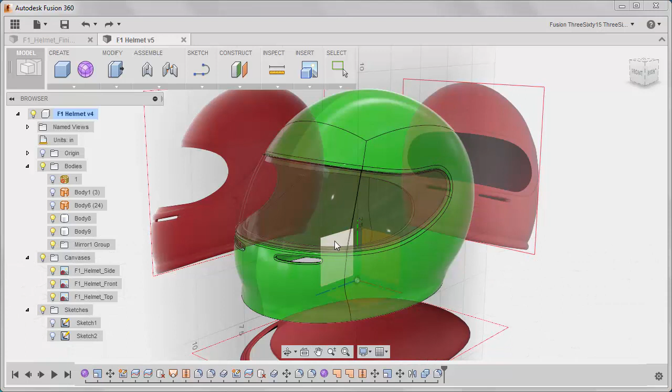In this video, we're going to look at modifying our helmet and the visor with a hole so that we can add a joint so the visor can actually have rotation. So let's get started. We're going to create a sketch. I want to select this plane, which goes down the middle of my helmet from front to back.

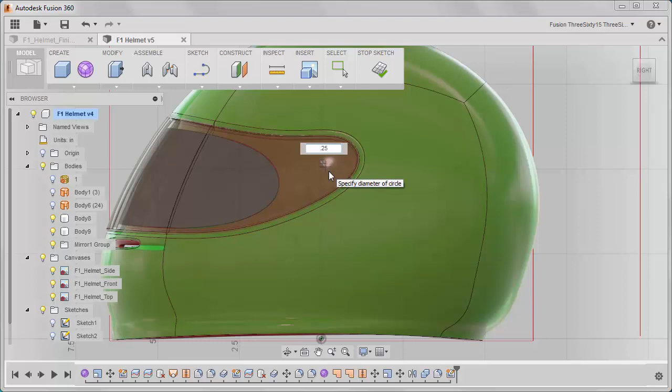What we're going to do is create a circle, center diameter, right in this area right here. And let's make it 0.25. And we're going to say right mouse button, OK.

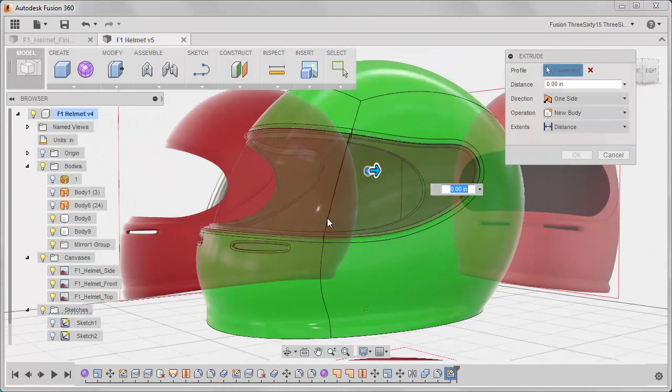Now I'm going to stop that. We're going to grab this circle and we are going to extrude this way. So if I pull this out, notice it turned red. And what it does is it automatically starts a cut operation if that's what you desire. And that is what we desire.

We're going to say symmetric so that it happens on both sides. I can also say join and it'll join it in there. I can create a new body if that needs to be a rod, but what we want it to do is we actually want it to cut a hole.

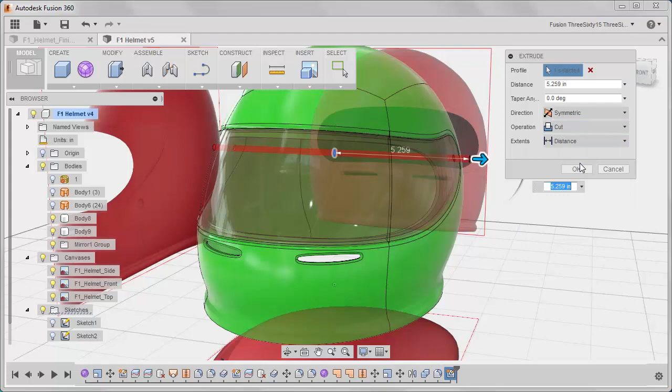Alright, so let's turn our canvas images off. There we go. Alright, now we're going to go to joint.

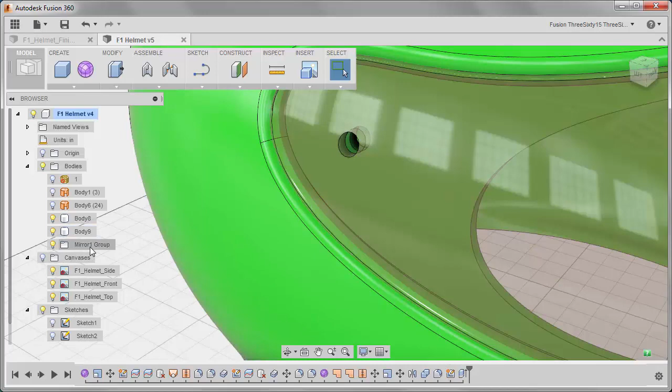Now it says no components exist in this design. What does that mean? Well, right now all we have is bodies. So to fix that, what we can do is right mouse button, create a component, and what that does is creates a component. You must have a component in order to use the assemblies.

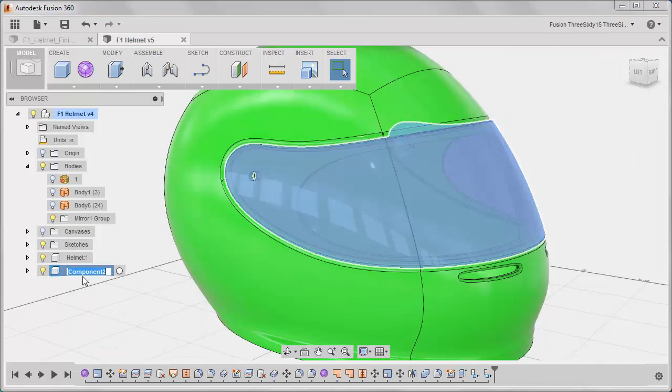Let's do the same with the visor. Create components, visor. So now watch what happens when we go back to the joint command. Now we can access it.

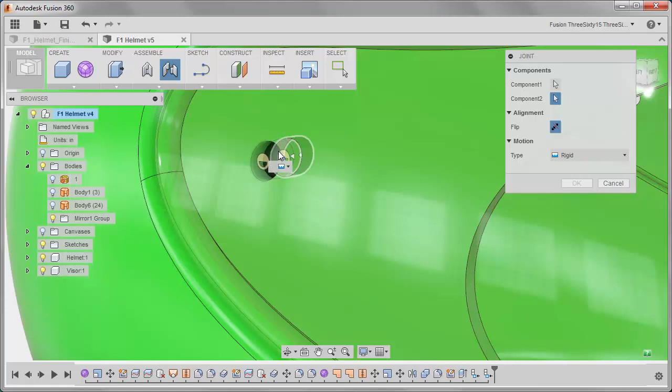So my first joint, I want it to be this face right here, and this face right here. Now it's moving it right on top. Watch what we do. We can say offset 0.25. Okay, that moved it in.

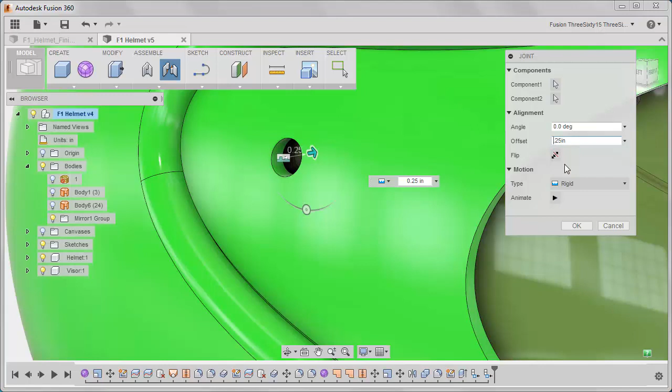What happens if we flip it? No, we don't want to flip it. How about minus? There we go.

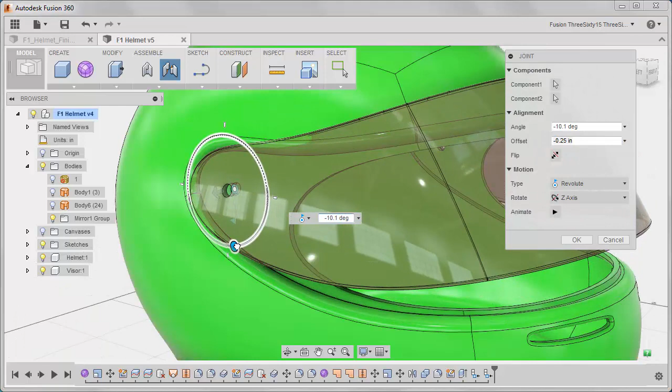Now, right now it's rigid. Watch what happens when we say revolute. Now I can grab this, bring it up like so, and say OK.

Or we can say, if we drive the joint, that was the right command, I can change that rotation.

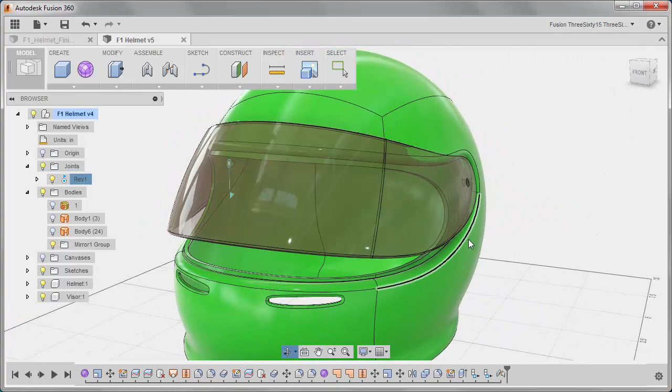Okay, we've come a long ways with our helmet here. So let's look at what it takes to create a nice rendering of this, and we will cover that in our next video.